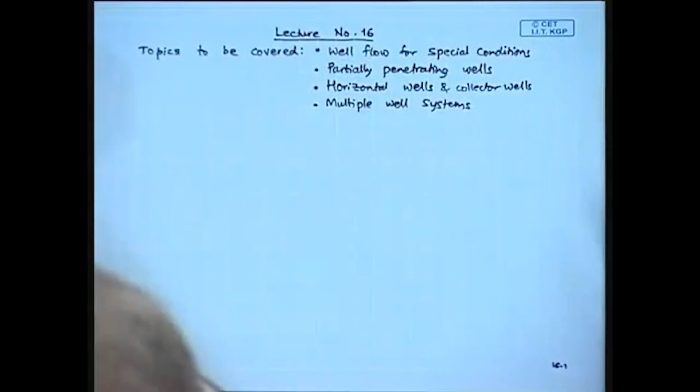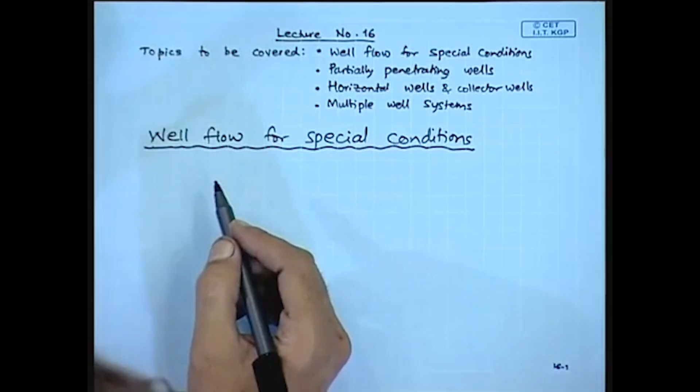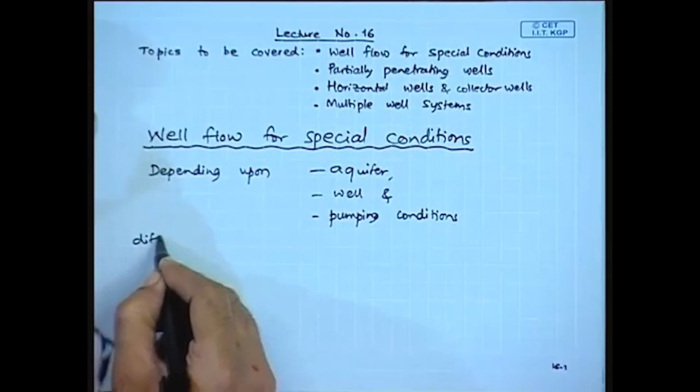Now we will start with the first topic of this lecture, that is well flow for special conditions. Depending upon three parameters, that is aquifer, well, and pumping conditions, different types of well flows can be observed. These are three vital parameters which may make things quite intensive and complicated, so we will not be able to focus very much on these parameters.

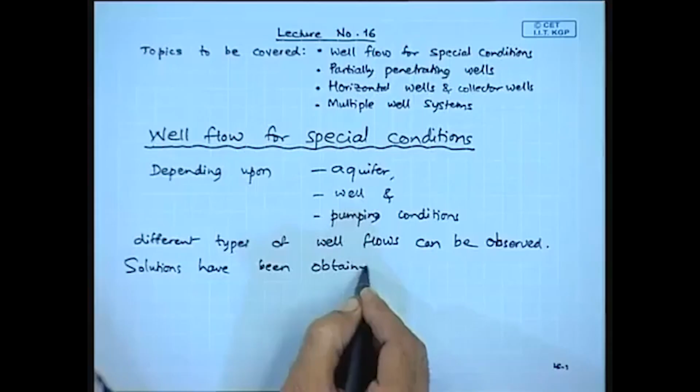Researchers have obtained solutions for problems consisting of different aquifer conditions, different well conditions, as well as different pumping conditions for the following special situations or circumstances. Solutions have been obtained by various researchers for the following situations involving any or all of the above three conditions, meaning the aquifer condition, the well condition, as well as the pumping condition.

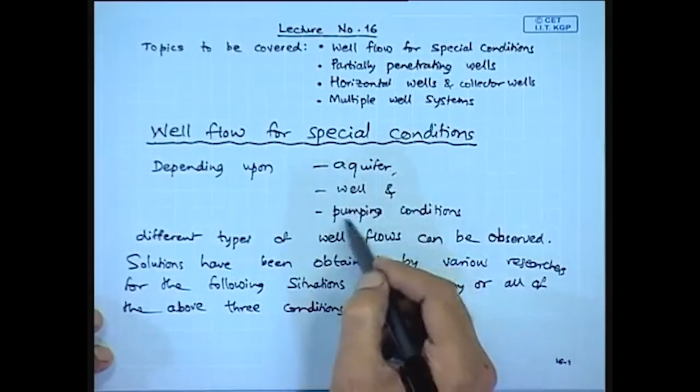Based on this, for different situations which are listed here, solutions have been obtained by various researchers. These different situations are listed here. The first one is constant well discharge, and we have already discussed many of these constant well discharge situations, and this is followed by varying, or cyclic or intermittent, discharge situations.

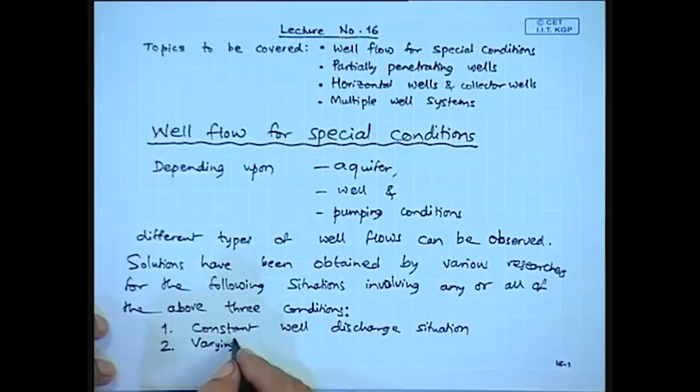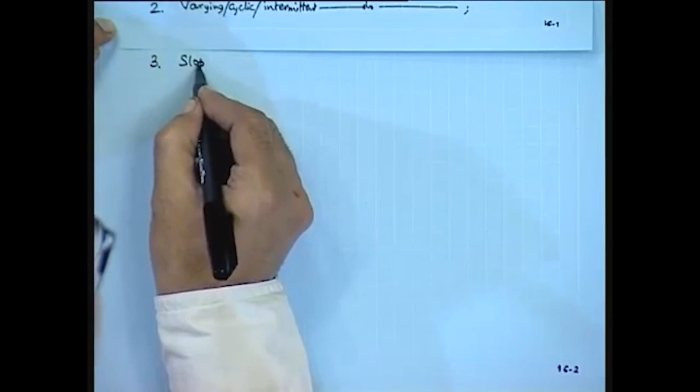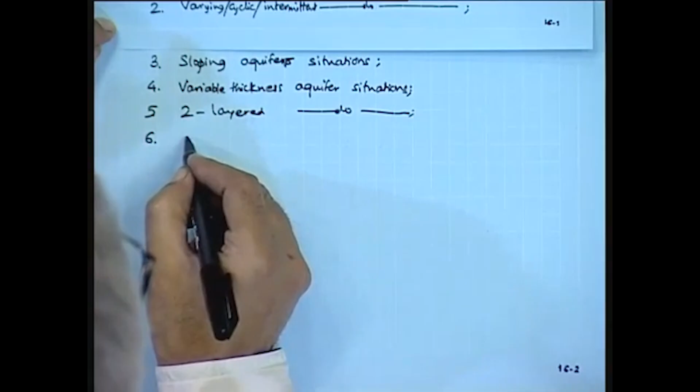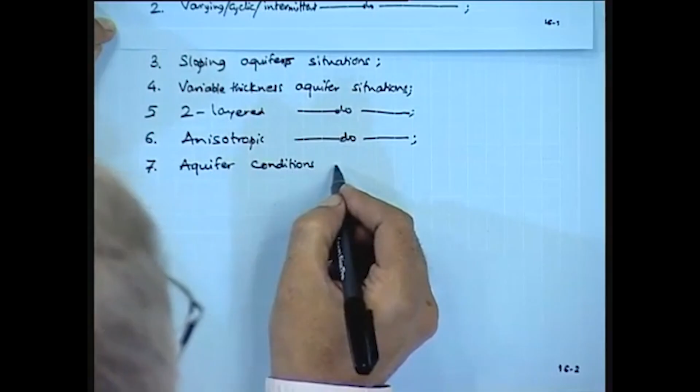Next we go to sloping aquifer situations, followed by variable thickness aquifer situations, followed by two-layered aquifer situations, followed by anisotropic aquifer situations, followed by aquifer conditions or situations varying with depth.

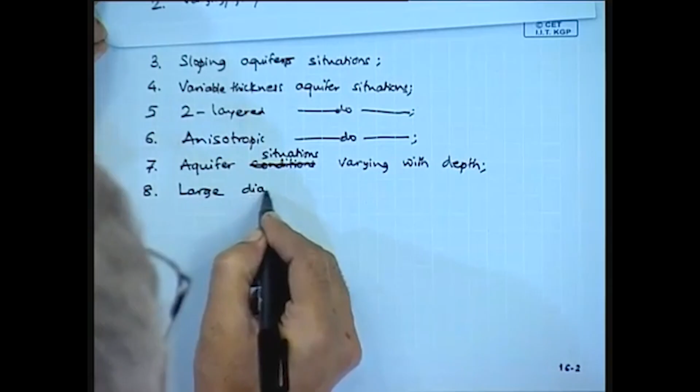So these are corresponding to aquifer conditions. Then the well, that is large diameter wells, large diameter well situations, followed by collector well situations, followed by wells with multiple sectioned well screens.

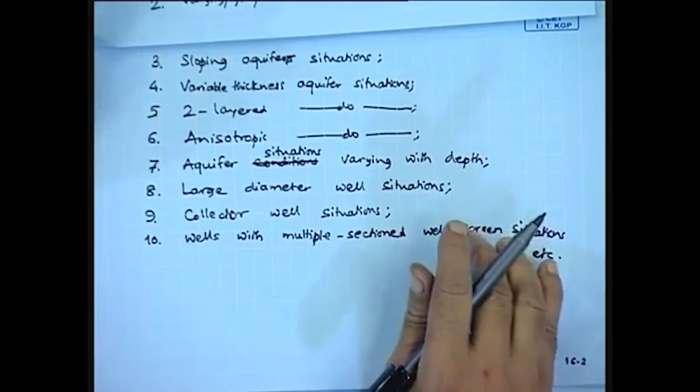We should not be under the impression that these are the only ten situations which we may encounter. After all, groundwater is subsurface water, and the situation may depend upon various aquifer conditions, well conditions, pumping conditions, or a combination of any of these three. So these are the ten major situations which researchers have considered and obtained solutions for. These solutions are fully analytical, analytical combined with field or experimental, or fully experimental, or a combination of others. This is how well flow for special conditions involving aquifer, well, or different kinds of pumping conditions is handled.

With this we will go to the next topic of this lecture, that is on partially penetrating wells.

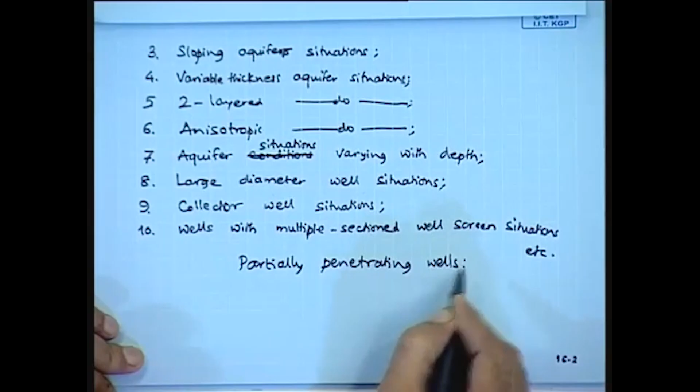We should note that some wells do not penetrate the entire thickness of the aquifer. Such wells are known as partially penetrating wells. The wells which are not dug or drilled till the bottom confining layer of the aquifer are called partially penetrating wells. It is a very simple and straightforward concept.

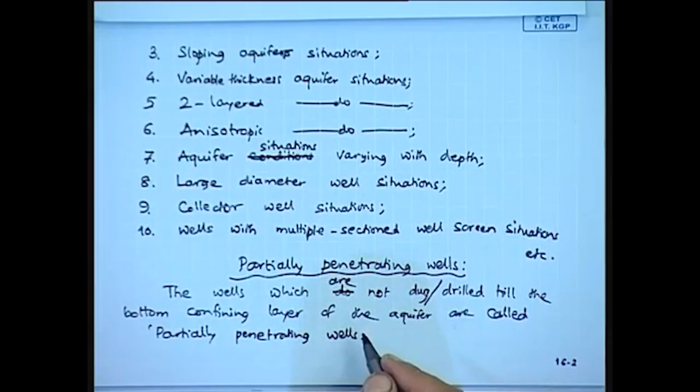In case of partially penetrating wells, unlike the fully penetrating well, wherein there is a radially inward flow all around the circumference of the well, the flow is slightly more complicated. There is flow not only through the inner cylindrical surface of the well, but also through the bottom horizontal surface of the well. In fully penetrating wells we assume the flow is radially inward and horizontal, with some slope for simplicity. Whereas in partially penetrating wells, especially at the bottom, the flow will be in an upward inclined direction, while through the sides, the cylindrical curved inward surface, the flow will be generally mildly sloping, horizontal as well as radially inward.

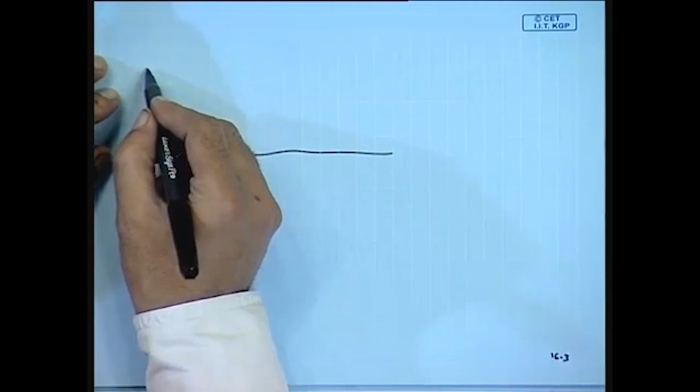The following sketch will represent these three. Let us consider, for simplicity, one water table aquifer.

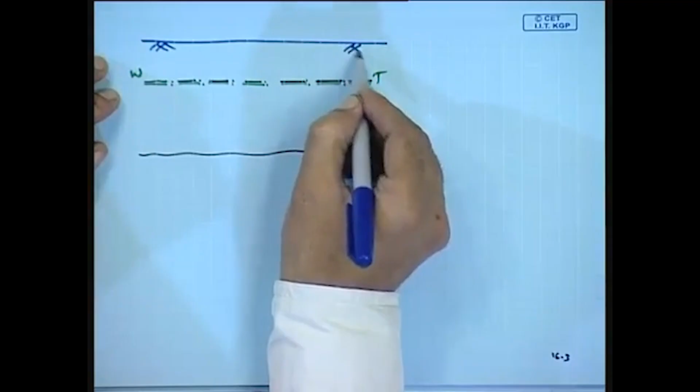Sticking to the convention of green for water table, so this is the water table, and then there is this ground level. In this case, let me show a fully penetrating well as well as a partially penetrating well. So, this is the bottom confining layer.

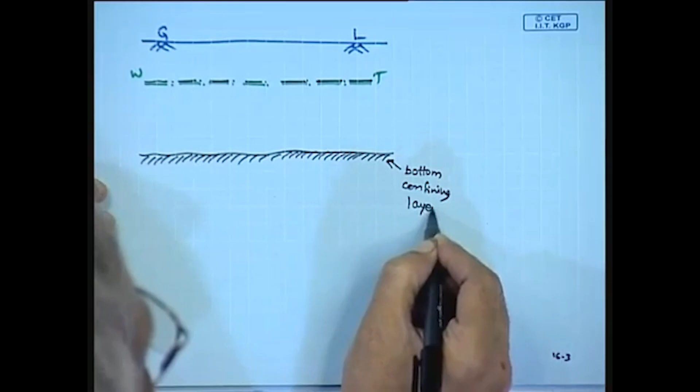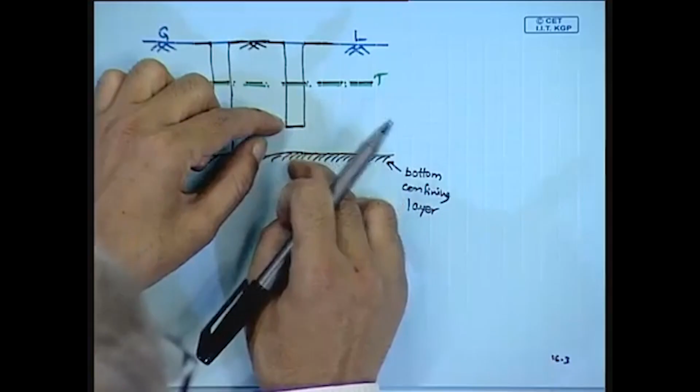So this is a fully penetrating well. Of course, there will be an opening here obviously, and there is also another well which is partially penetrating. Let us say it is dug only up to this much fraction, and then below this, even though it is an aquifer, so this is an unconfined aquifer.

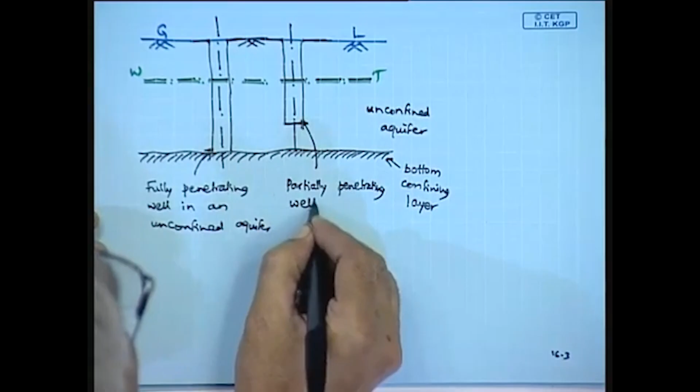Similarly, so this is here, so this is a fully penetrating well in an unconfined aquifer, whereas this is a partially penetrating well in an unconfined aquifer. Let me show here with the break line.

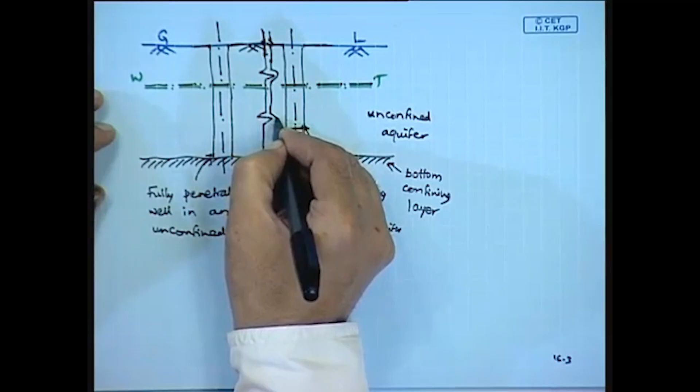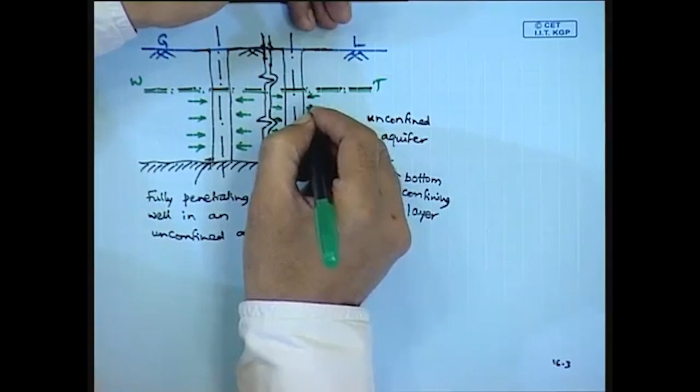So in this case, let us say suppose these are the flow lines into this fully penetrating well, which are almost horizontal, whereas in case of this partially penetrating well, through the cylindrical surface, the flow lines are radially inward and almost horizontal, whereas through the bottom also there will be some groundwater. In this case, both are discharging wells, represented by this letter Q.

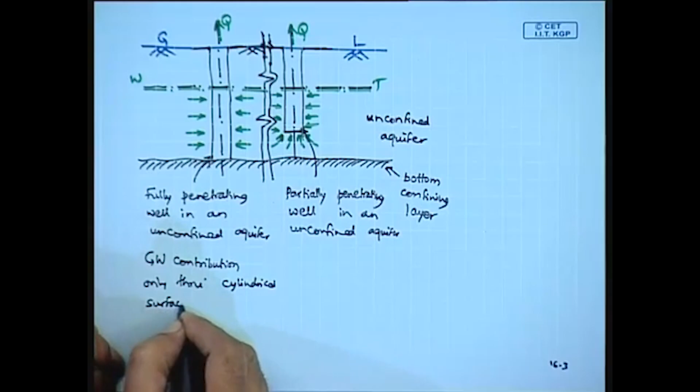So therefore, we do get the upward flow, or the inclined upward flow, through the bottom of this partially penetrating well. So here we can write down, this is groundwater contribution only through the cylindrical side surface of the well.

Whereas in this case, GW stands for groundwater contribution through the side cylindrical surface, and also through the bottom surface of the well. So through the side cylindrical surface, it will be mostly horizontal, radially inward flow, whereas through the bottom it is an upward inclined flow.

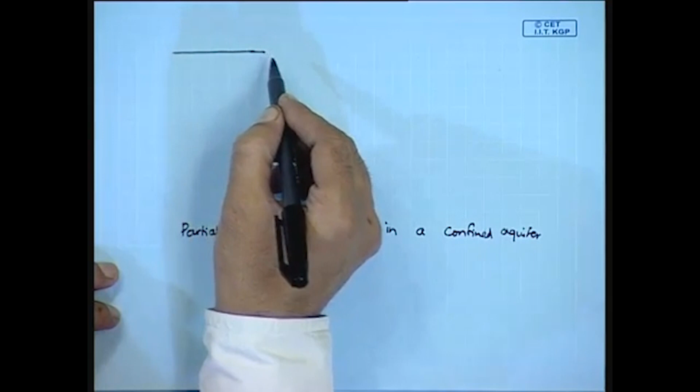So therefore, here we can denote this as in case of an unconfined aquifer. Now, let us also consider a confined aquifer, a partially penetrating well in a confined aquifer. Of course, it is not much different from a partially penetrating well in an unconfined aquifer. Only thing is, in case of confined aquifer, the flow takes place under pressure.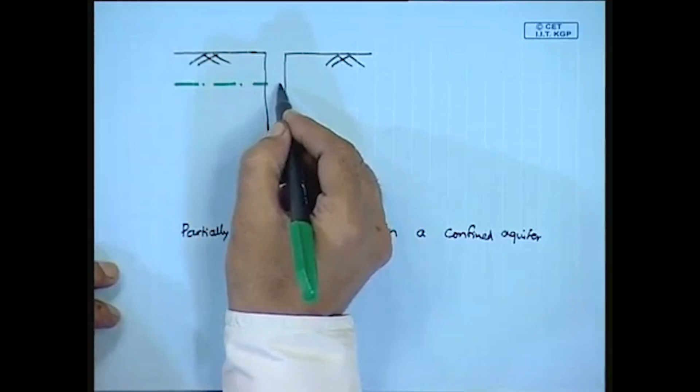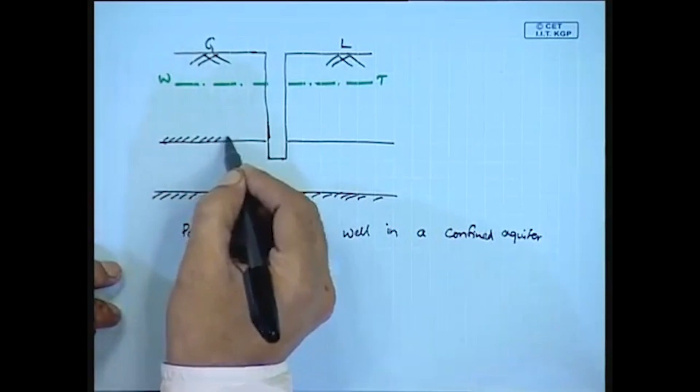Suppose this is the ground level, and then this is the water table, and let us also consider this is the bottom confining layer of the confined aquifer, and this is the top confining layer. And let us say this is the impervious layer which distinguishes the unconfined aquifer, which is at the top, and the confined aquifer.

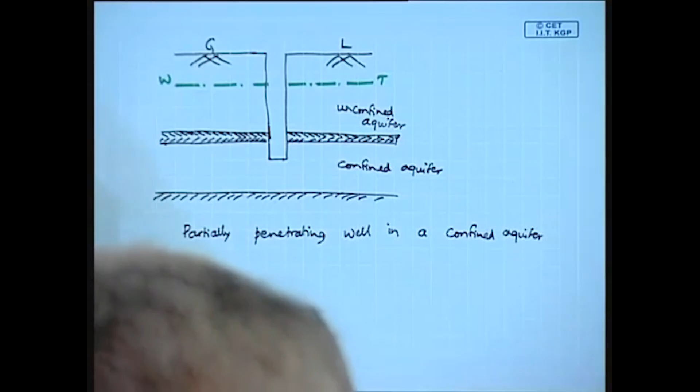So this is the unconfined aquifer, and this is the confined aquifer. And in this case, this is the original water table or piezometric surface, original piezometric surface denoted by this letter Wt, and then here with this, had the well been fully penetrating, maybe let me show it here.

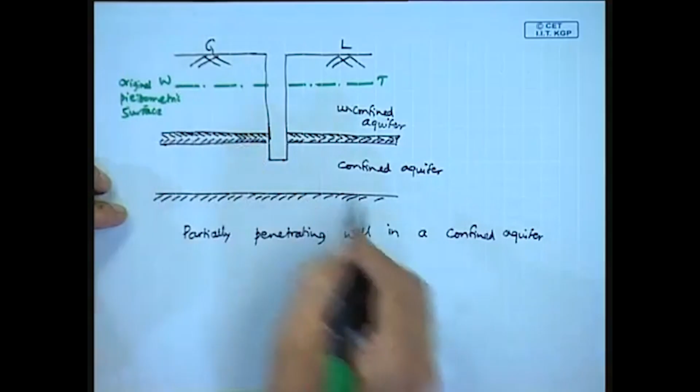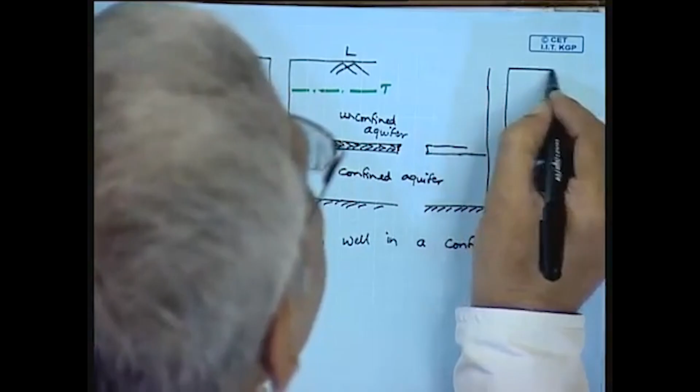So this is, and say this is the original piezometric surface. So this is also the same. Original piezometric surface, let me abbreviate this as OPS, and here this is original piezometric surface, and this is a fully penetrating well, this is the partially penetrating well.

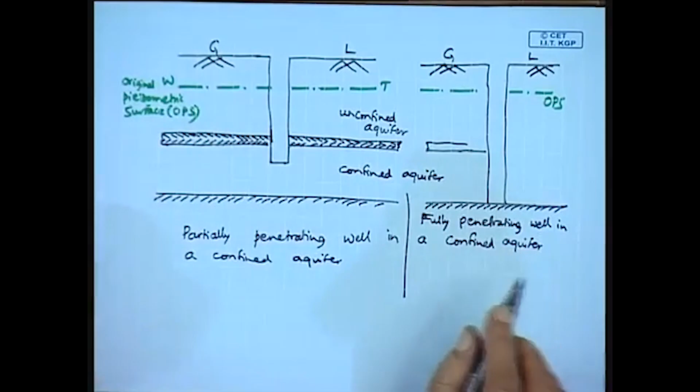And here we have, so this is a fully penetrating well in a confined aquifer, and obviously this is the center line of the partially penetrating well, this is the center line of the fully penetrating well, and so these are both discharging wells.

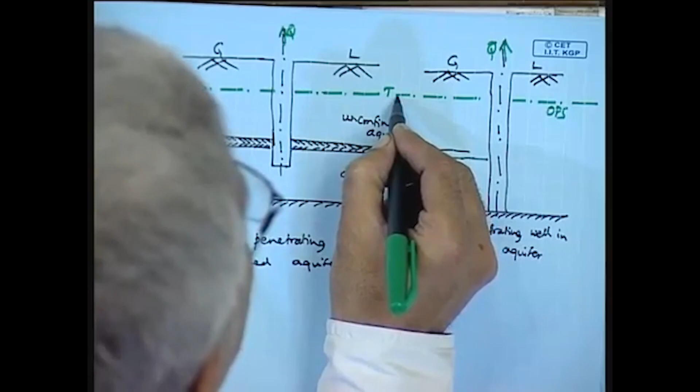And in this case, so what will happen is, in case of full penetration, the drawdown curve will be somewhat like this, whereas for the same aquifer, the drawdown curve for a partially penetrating well in the same confined aquifer... I'm sorry, I used the wrong color, it's this one.

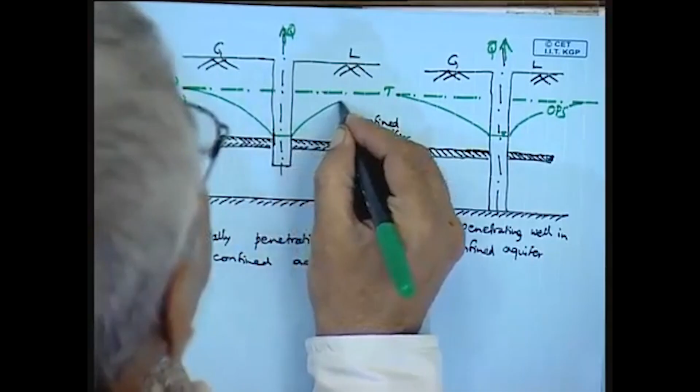So whereas in case of this partially penetrating well, the drawdown in this case, if we denote this drawdown by the letter SP representing the drawdown for partially penetrating well, and whereas in this case, the drawdown for fully penetrating well, we can write down the relationship, that is SP, the drawdown, is greater than S.

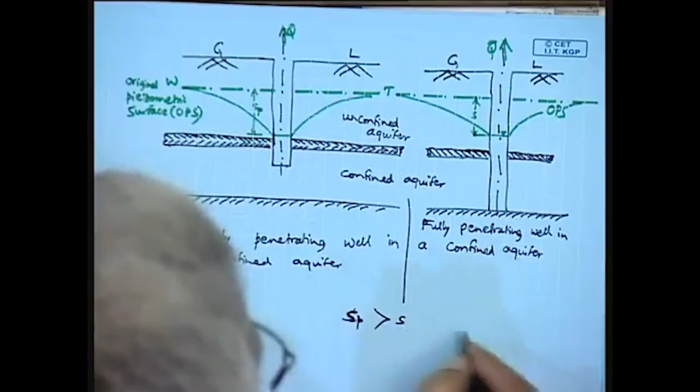And so in case of this one, the streamlines will be like this, whereas in case of fully penetrating well, the streamlines are almost horizontal and radially inwards, like this. So in case of partially penetrating well, this is a higher drawdown, as compared to a fully penetrating well. Okay, so this is a drawdown slightly lower.

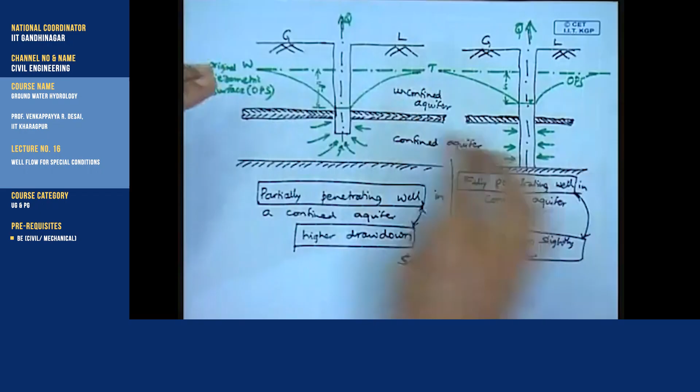So this is the higher drawdown for partially penetrating well, and drawdown slightly lower, so this is for fully penetrating well. Okay, and here, so like this, the area of the circle of influence may all be more or less the same, but only thing is, in case of partially penetrating well, the drawdown will be more, for the simple reason that the area which absorbs, which draws water, is more, because this area which draws water is not only the cylindrical curved surface, but also the bottom surface of the well, which in most of the cases is horizontal. So, therefore, since the area is more, obviously the amount of water extracted is also more, so therefore, the drawdown in case of partially penetrating well is more.

So with this we will complete the second topic of today's lecture, and next we will go to the third topic, which is on horizontal wells and collector wells.

And here these horizontal wells play a very major role, especially in providing the large amount of groundwater that is required generally in case of say municipal water supply schemes. So here, for the simple reason that the horizontal wells, the flow into the well is along the axis of the horizontal well, whereas in case of these vertical penetrating wells, the flow is perpendicular to the well axis.

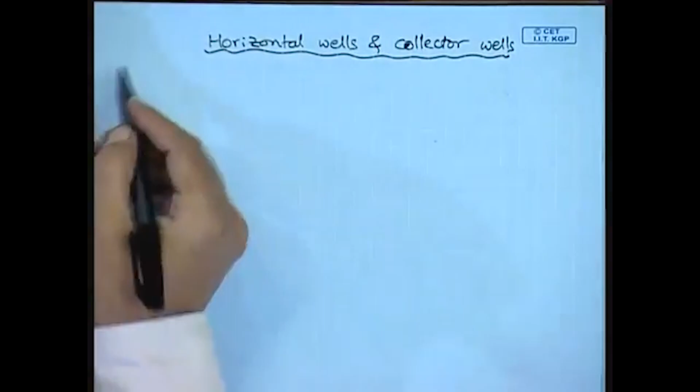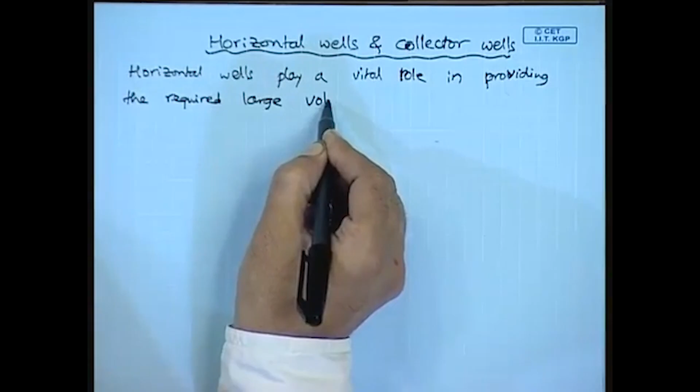The groundwater flow is perpendicular to the well axis, whereas in case of horizontal wells, the actual flow is perpendicular to the horizontal well axis, but the combined flow is along the horizontal well axis. So here, therefore, they play a very vital role in providing the adequate groundwater supply. Horizontal wells play a vital role in providing the required large volume of groundwater, especially in case of municipal water supply schemes.

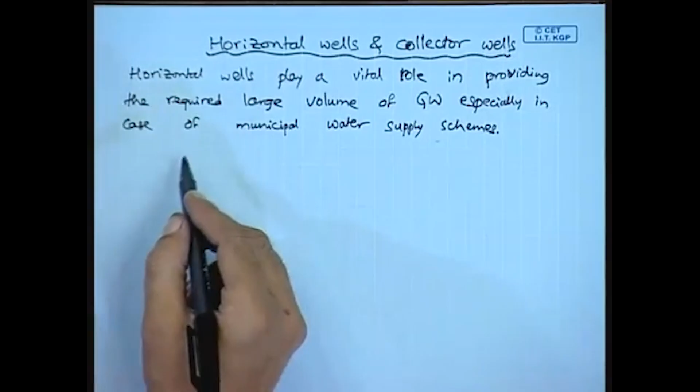So here, and then of course, there are infiltration galleries as a type of this. So this is infiltration galleries and collector wells, which are also some form of horizontal wells.

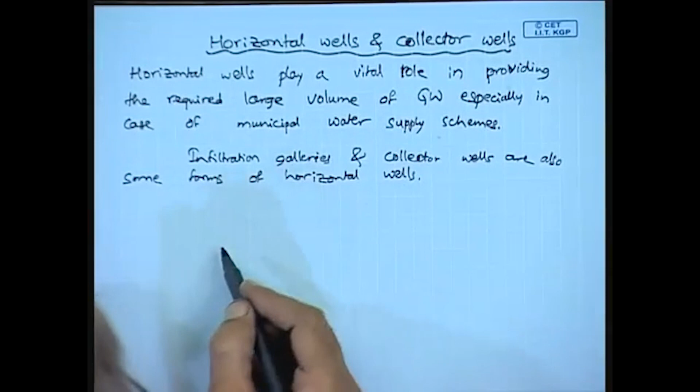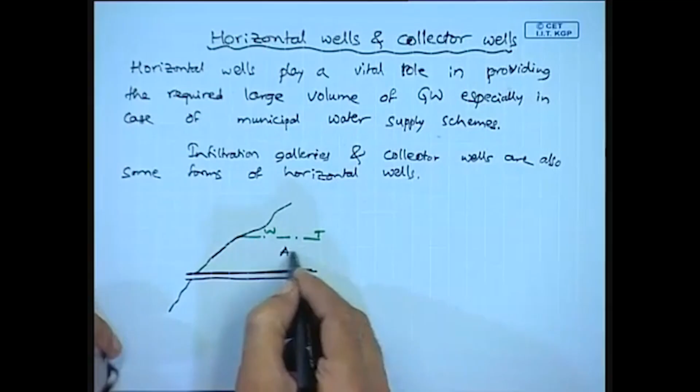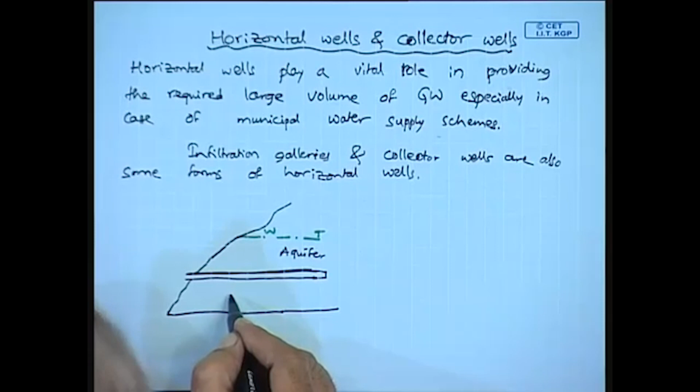And in this case, suppose this is the horizontal well, and then followed by, so in this case there is a water table. So here this is the water table, and here this is the aquifer, and here we will show this is the impervious layer. So this is the impervious layer.

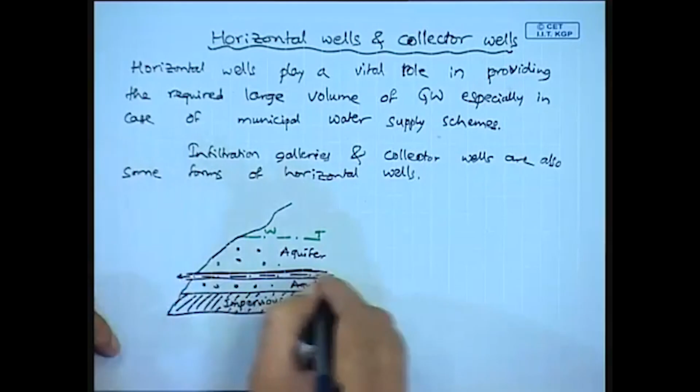So this is the aquifer is here. So here also this is aquifer. And then this is the horizontal well. So this is the, and here this is the seepage area, or say which is also generally referred to simply as seep area, and this is the water table, and here we can say this is the break line I am showing here.

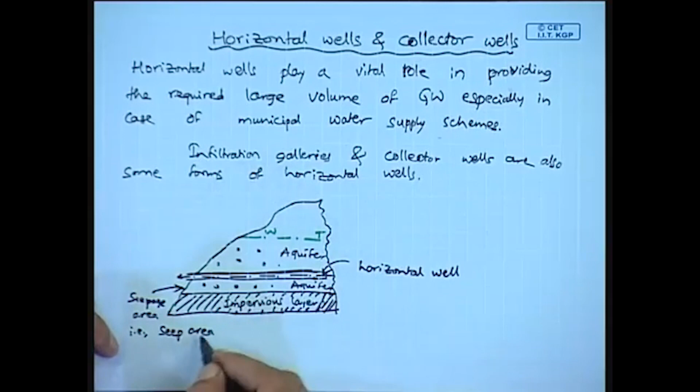So this is the one wherein the formation of these groundwater layers is almost in the horizontal direction. It can also be that this groundwater, these rocky formations, geological formations, may be mostly in the vertical direction also. In such case, the horizontal well will be somewhat different.

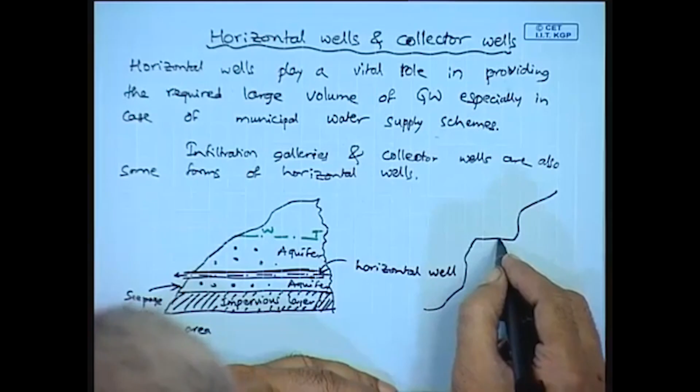So in this case, let us say this is an impervious layer. And here say this is the, and then here this is the aquifer, and here let us say this is the water table. So in this case the general formation of the geological formation direction is in the vertical direction.

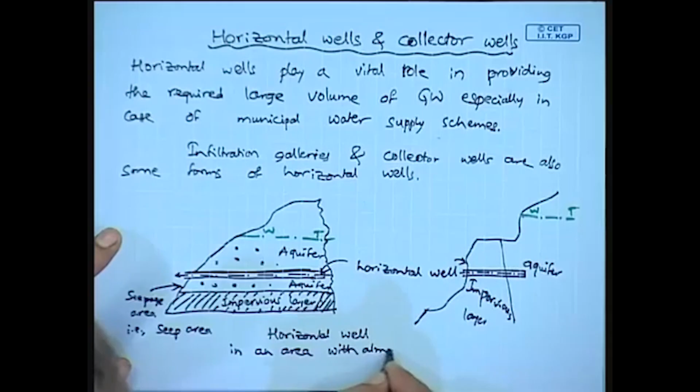So again here also we can show a horizontal well which will be, so this is horizontal well. So this is a horizontal well in an area with almost horizontal geological formations. Similarly, this is a horizontal well, so this is the horizontal well.

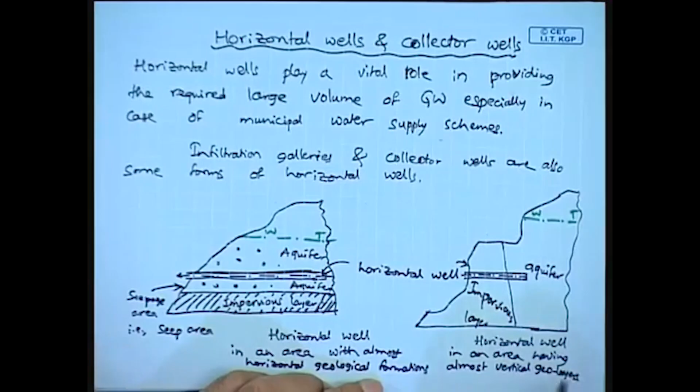In an area having almost vertical geological formations or geolayers, horizontal wells are used. Depending upon the area, the seepage area is much more, and the gradient in this case is quite less compared to vertical wells. Therefore, Darcy's law will be more applicable, and that is the reason why the output by these horizontal wells is much more than a regular vertical well.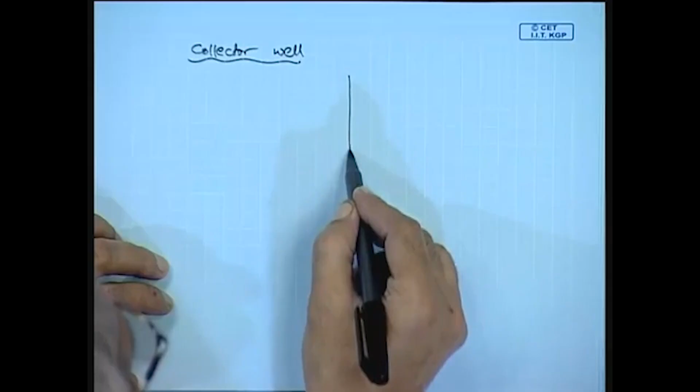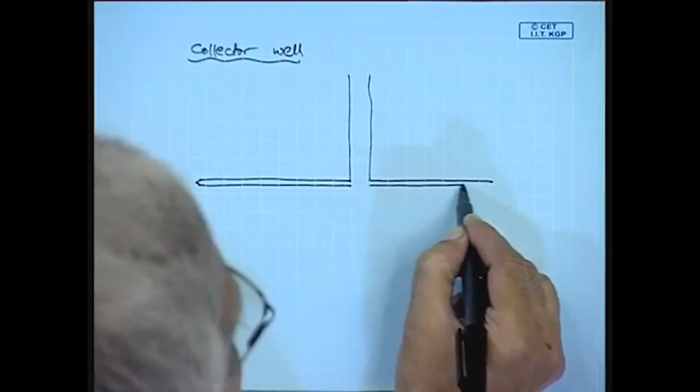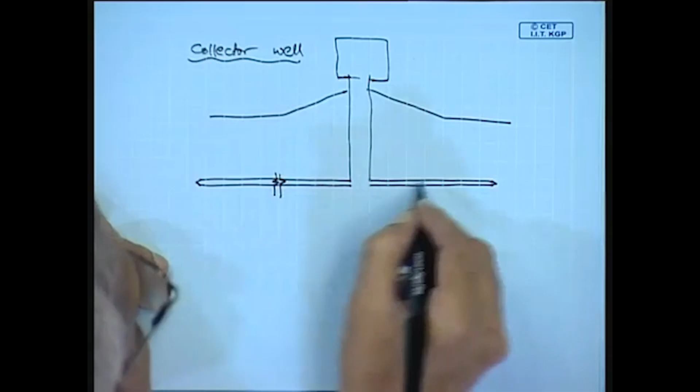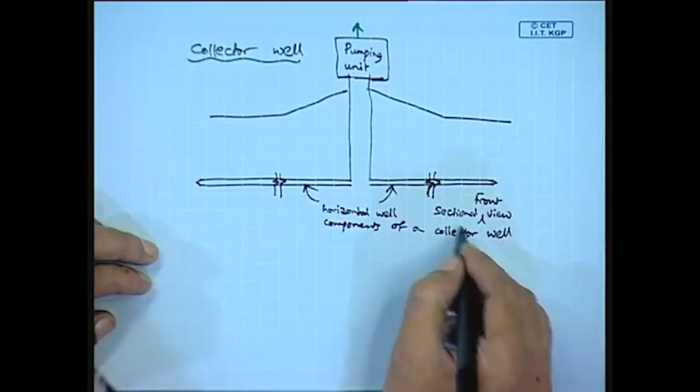Now let us consider a collector well. Suppose this is the sectional front view. Here, of course, there can be a break line. This is the pumping unit, through which the water is pumped. This is the sectional view, sectional front view, and these are the horizontal wells, horizontal well components of a collector well. So this is the sectional front view, and now let us draw the top view.

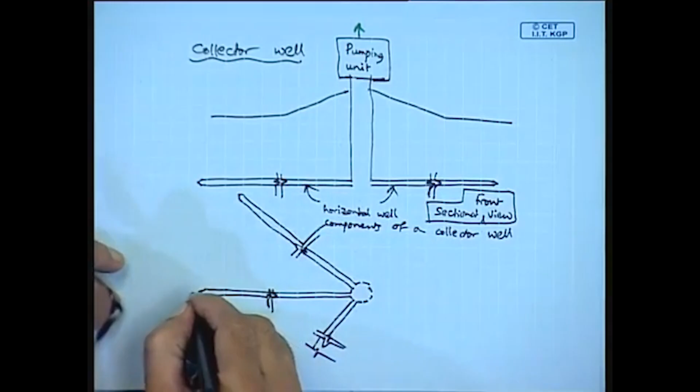In the top view, so here this will be shown, and all these are radially emanating. Here you can show the axis. There can be any number of these radial horizontal wells which together constitute what is known as a collector well.

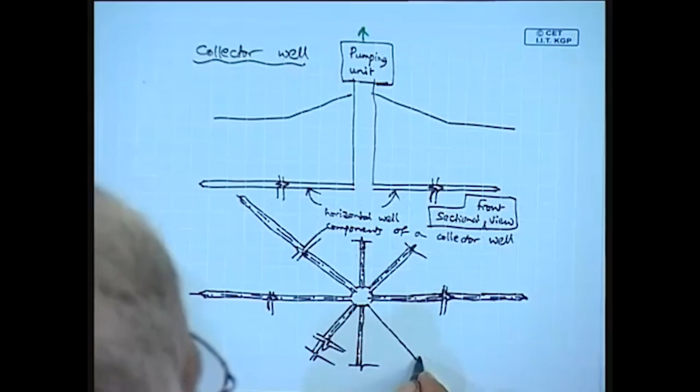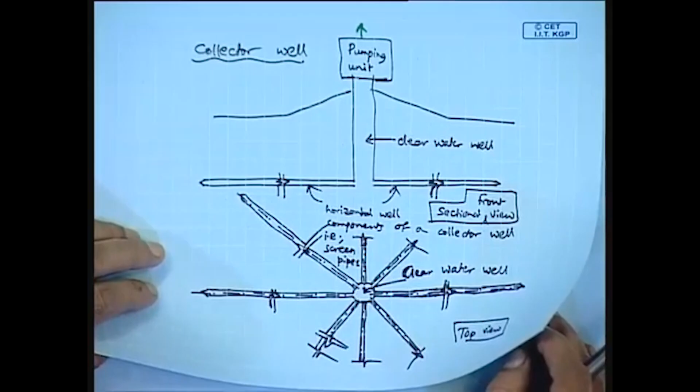In this case, so this is the top view of this collector well, and here these horizontal well components are generally referred to as screen pipes. Together they form a collector well. So this is the clear water well, and a collector well is basically a combination of a number of horizontal wells generally located at the same level.

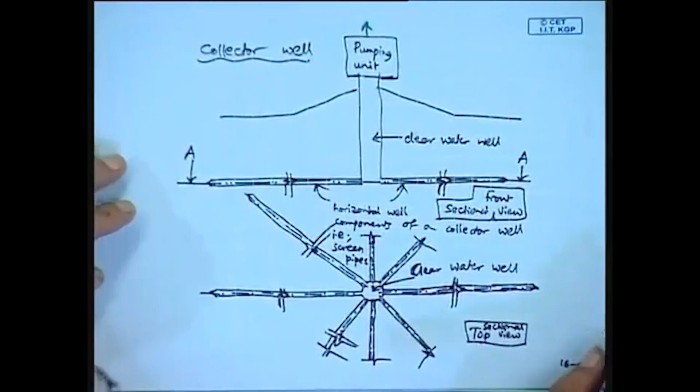So this is a sectional top view of a collector well. These play a very vital role in ensuring adequate groundwater supply, generally in municipal water supply schemes.

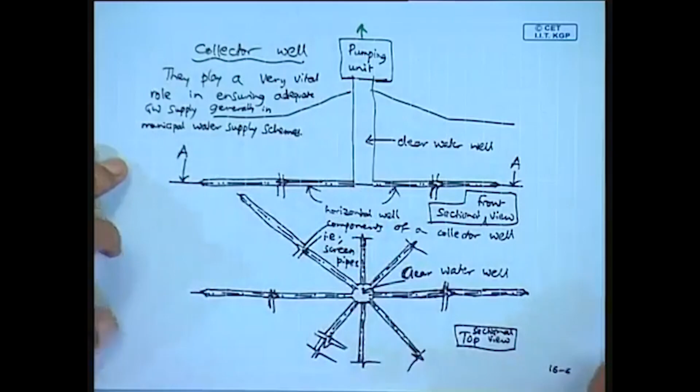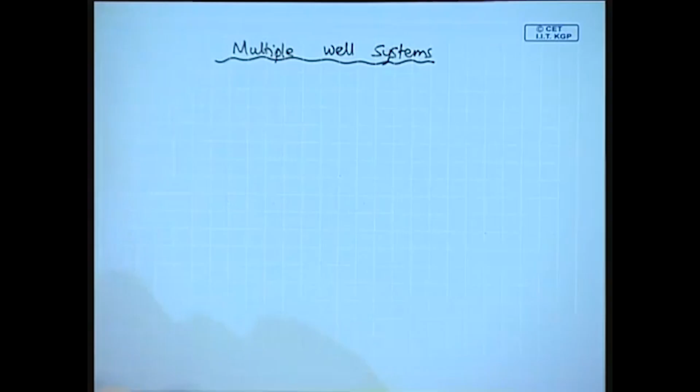This completes the third topic, and the last topic of today's lecture is on multiple well systems. As the name itself says, there are a number of wells involved in this multiple well system. It is self explanatory, there are a number of wells which constitute this multiple well system.

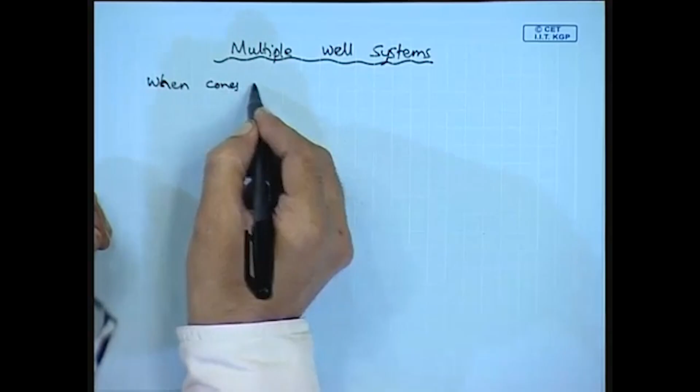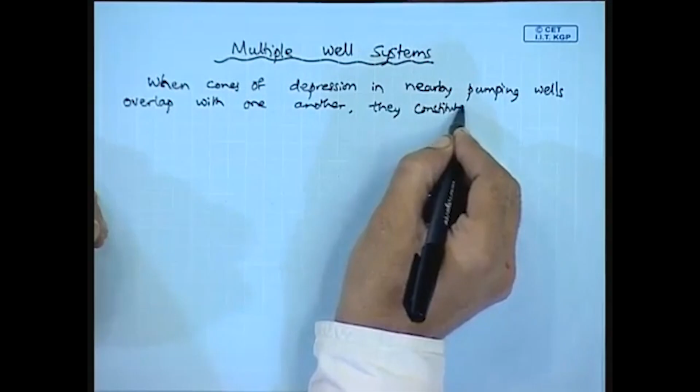Now let us consider: when cones of depression in nearby pumping wells overlap with one another, they constitute a multiple well system. Basically, a multiple well system has nearby wells, and each of these wells will have a cone of influence, or cone of depression, and these cones of depression of nearby wells will overlap with one another. Let us show this with a multiple well system with say 3 wells, wherein the cone of depressions of each of these wells is overlapping.

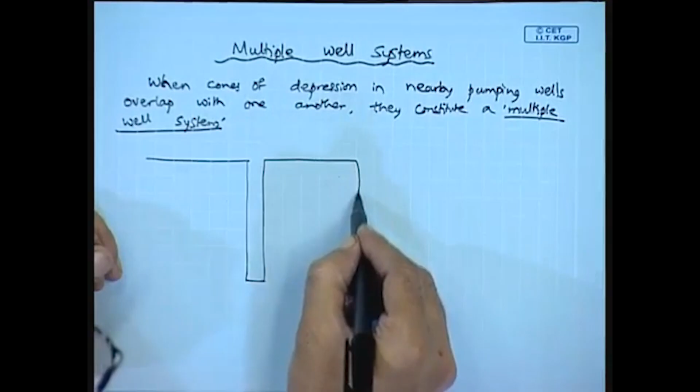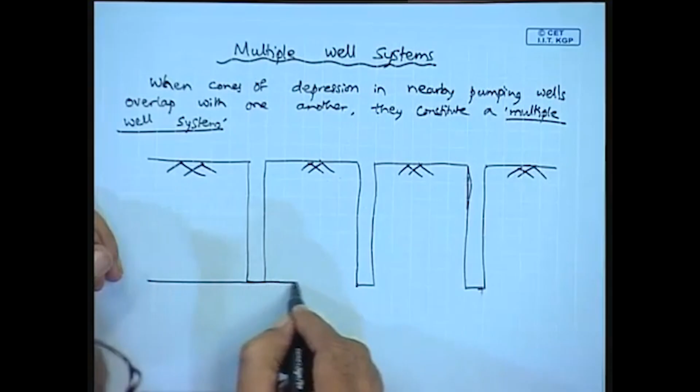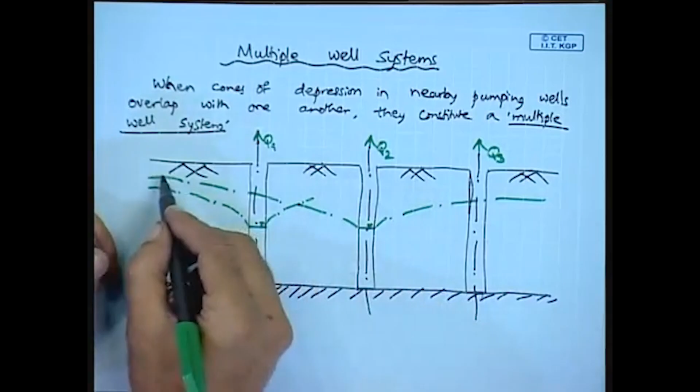In this case, let us say these are the 3 wells, and let us consider that this is the common bottom impervious layer. Each of these wells are discharging wells: this is Q1, this is Q2, and this is Q3. Suppose this is the cone of depression for this well, and there will be another cone of depression for the other, and similarly a third cone of depression. A resultant cone of depression will be something like this.

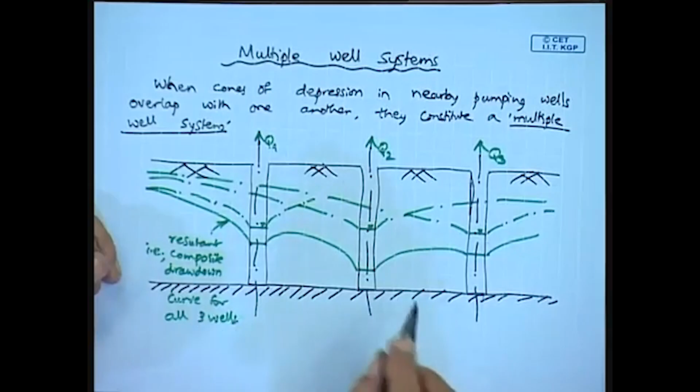So this is the resultant, that is the composite drawdown curve for all 3 wells. These are the individual drawdown curves for each of the wells, and this is the resultant. With this, multiple well systems and this lecture will stop here, and in the next lecture we will discuss the further topics. Thank you.